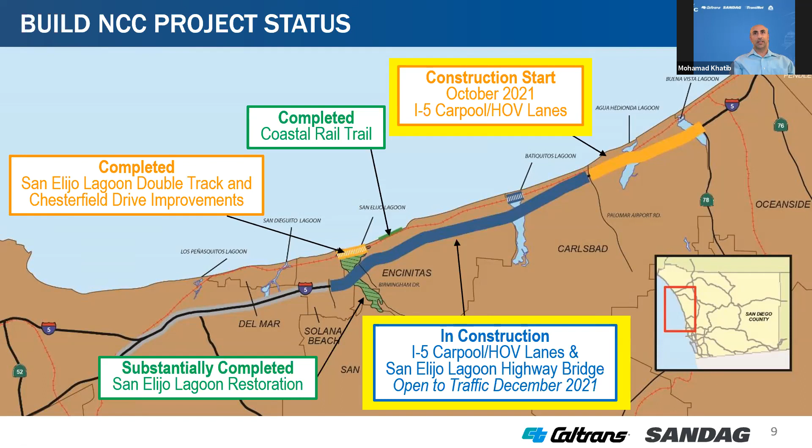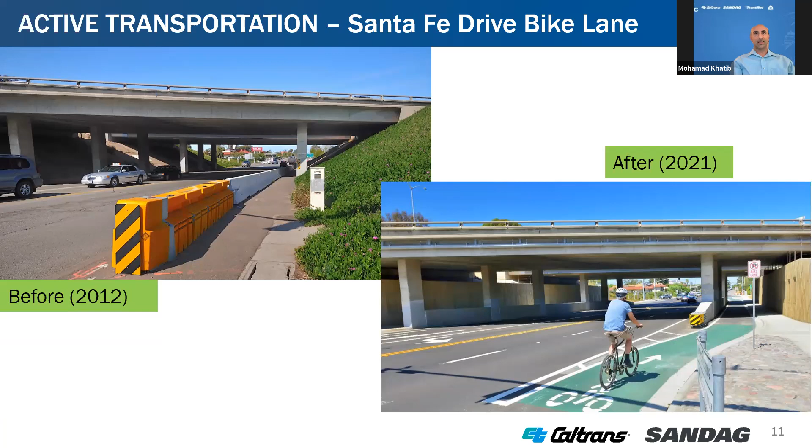Here's an example of a community enhancement at Santa Fe that will reconnect communities, improve coastal access by providing room for bike lanes and wide sidewalks, along with transportation art in alignment with community character. There will be, like Mayor Hall alluded to earlier, an enhancement similar to this at Chestnut Avenue in the city of Carlsbad. We'll talk a little more in depth about that later in this presentation.

Okay, and here's a visual simulation of another active transportation feature where the pedestrian bridge is suspended from the bottom of the San Elijo Highway Bridge to provide north-south connectivity across the lagoon, complementing the trail network in the area.

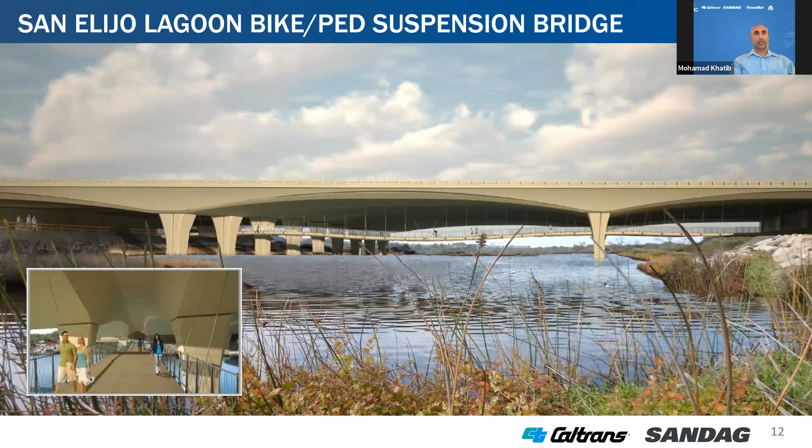Also, as you can see here, the San Elijo Highway Bridge is substantially complete, and it's been quite a journey to get here. Working in wet conditions with sensitive utilities nearby presented a lot of challenges that our construction team, contractor, and designers were able to overcome, providing a new bridge approximately twice as long to facilitate tidal flushing within the lagoon, and almost twice as wide to accommodate the future phase 2 express lanes.

One more note - the work pad and rock you see under the bridge is the final piece of work to be removed to complete the San Elijo Lagoon restoration effort. Thus far, the restoration has shown significant improvement in health, with enhanced tidal circulation, creation of habitat, and restoration of over 470 acres.

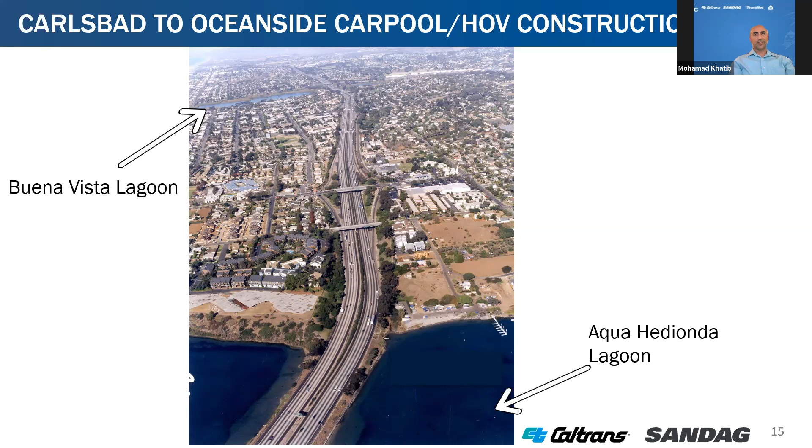Okay, next slide please. So what to expect during construction? As Mayor Hall alluded to earlier - no pain, no gain. On a majority of our highway contracts, night work, ramp closures, and detours are essential for construction. The good news is the majority of the widening for this 4-mile stretch is limited to the median, with minimal impacts to ramps.

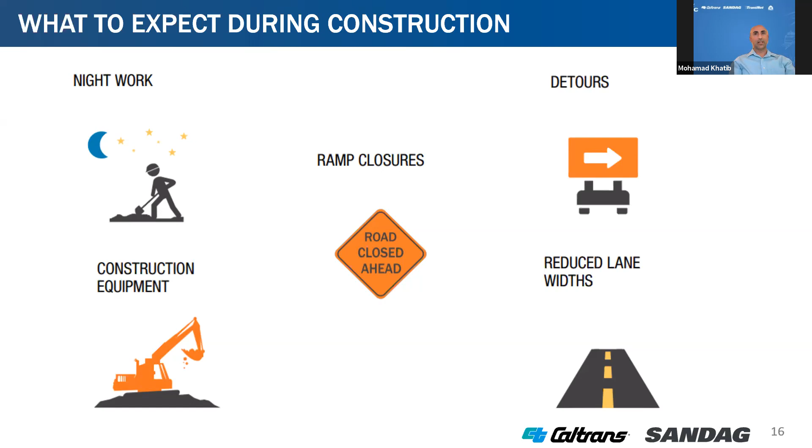Something we've noticed at the beginning of construction projects is that there may be heavier than usual delays as traffic gets used to the construction impacts, such as temporary barriers and reduced lane widths. But with that said, our Build NCC team is active in informing the public in advance of construction impacts so folks can plan accordingly. Next slide, please.

Okay, thank you. So this slide here is our staging exhibit that will help explain how the HOV lanes will be constructed.

Traffic will be shifted to the outside, away from the median, and we will maintain the same number of lanes. However, those lanes will be reduced in width, along with the inside shoulders, to make room in the median for placement of the temporary barriers and to provide space for our work area.

This project will also pilot the temporary striping that Mr. Brian Hadley will be discussing later in this presentation. This staging configuration will also provide standard outside shoulders. The only time the number of lanes will be reduced would be during our temporary night closures.

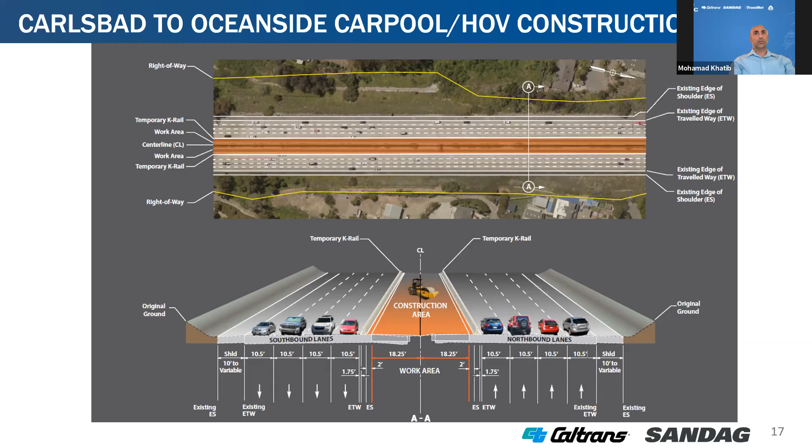This configuration will be in place for approximately 12 to 15 months. After the completion of this stage, the HOV lanes would be open to traffic, and temporary barriers would be shifted to the outside for the construction of auxiliary lanes. Okay, next slide, please.

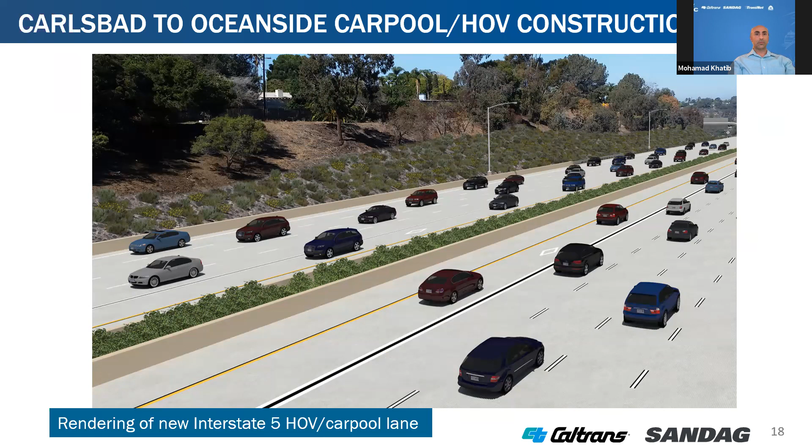So after it's all said and done, the final product would provide one HOV lane in each direction, standard outside shoulders with variable width median shoulders. We'll also replace the median oleanders with native coyote brush. And that's a simulation of what the product would look like.

This is the Chestnut community enhancement. As part of our phase 1 improvements, we collaborated with the city of Carlsbad on this location. The improvement here will include retaining the abutments of the undercrossing to provide room for bike lanes and wider sidewalks for improved east-west connectivity under I-5. We're also excited to incorporate the transportation art based on the city's recommendation.

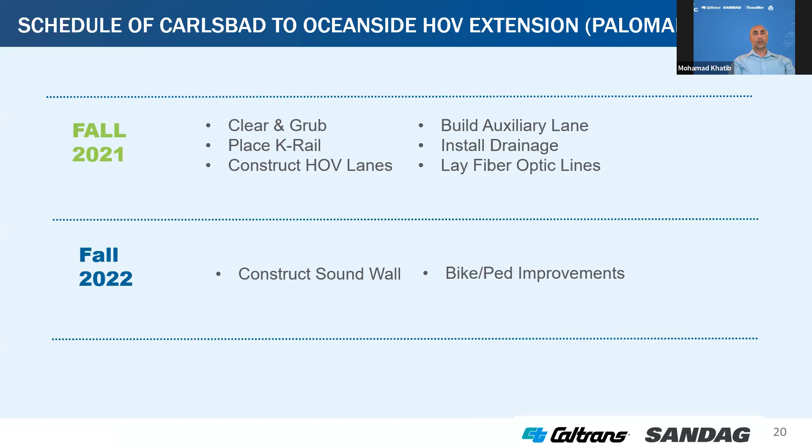As far as the overall project schedule, this fall you'll see crews placing temporary barrier in the median, clearing the vegetation, installing drainage and other utilities like fiber, and following up with construction of the pavement. Next fall, you'll see crews mobilized to the outside to start construction on the sound wall, the Chestnut community enhancement, and aux lanes.

Some of our upcoming milestones include the completion of the San Elijo Lagoon Highway Bridge, along with the pedestrian suspended bridge, and then the completion of the carpool lanes up to Palomar Airport Road. These two events will culminate with a ribbon cutting that's tracking for end of the year, early next year.

We will also be closing gaps within the San Elijo Lagoon Trail Network and completing a portion of the North Coast Bike Trail. As we know, with the addition of carpool lanes to our network also comes sound walls within the corridor. And I'll now hand it over to my colleague, David Stebbins, to get into more detail about sound walls. Thank you, Mohamad.

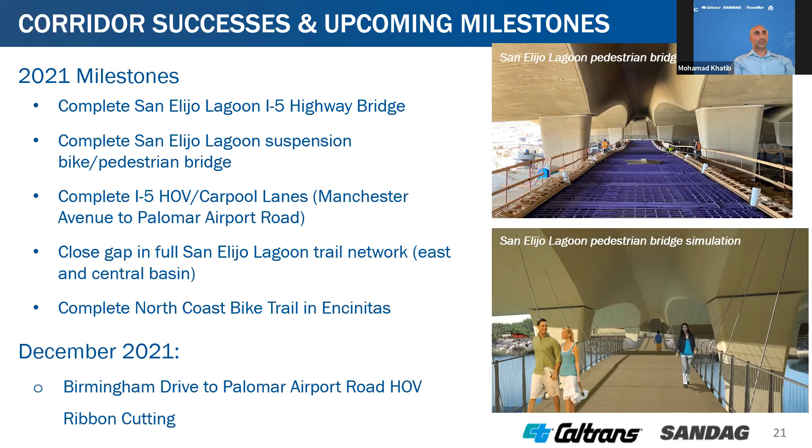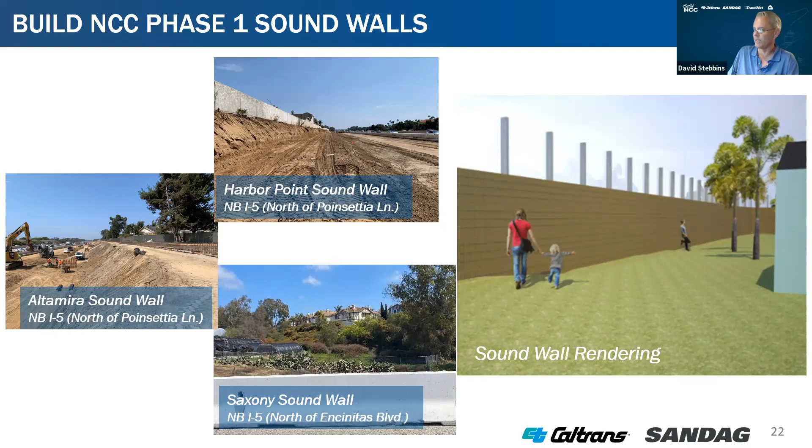Now in Carlsbad, we're recommending 15 walls total. 3 of the walls are in phase 1. Just north of Poinsettia Lane on the east side of the freeway are 2 sound walls currently in construction, in the Harbor Point and Altamira communities. There's another wall just south of Tamarack Avenue on the east side of the freeway, at the Casa Riviera apartment complex, and that's the wall that's going to start construction in 2022.

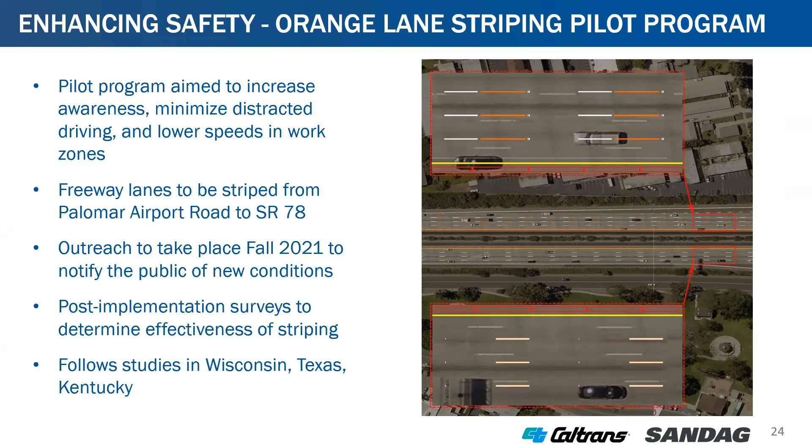Okay, so the types of contrast we're going to use: in the southbound direction, we'll use orange that'll precede the white lane line, like you see on the top left there. And then on the northbound direction, the lane lines will have orange along the sides.

Part of the reason we chose that option is if you're driving southbound, a lot of times the low winter sun will kind of fade out stripes. So we wanted to have a really visible one for the southbound. Go ahead, next slide.

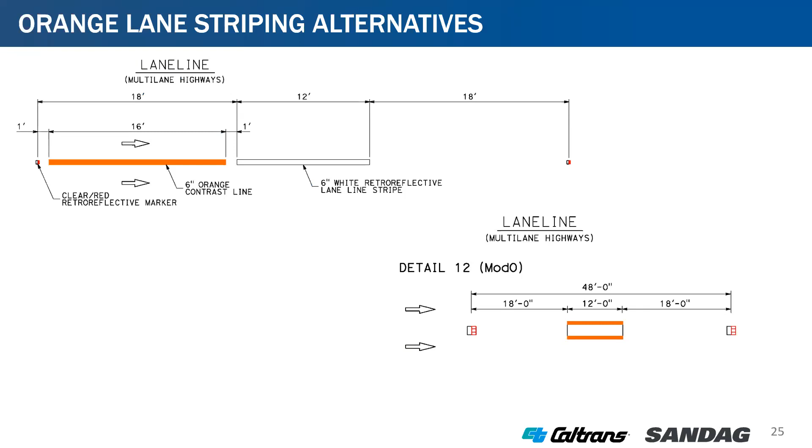And then for what we call trap lanes and your gores at on and off ramps, in those cases we're going to use the same, what we call the Oreo pattern, because just like we're doing on the northbound for lane lines, that's kind of your only option to contrast those. For the right edge line, there'll be an orange stripe along the right side. So you can probably tell from these examples, it's what you're used to seeing on permanent delineation that has black contrast, and that's what's different about what we're doing in California. It's the first time we've kept the normal delineation, but contrasted it.

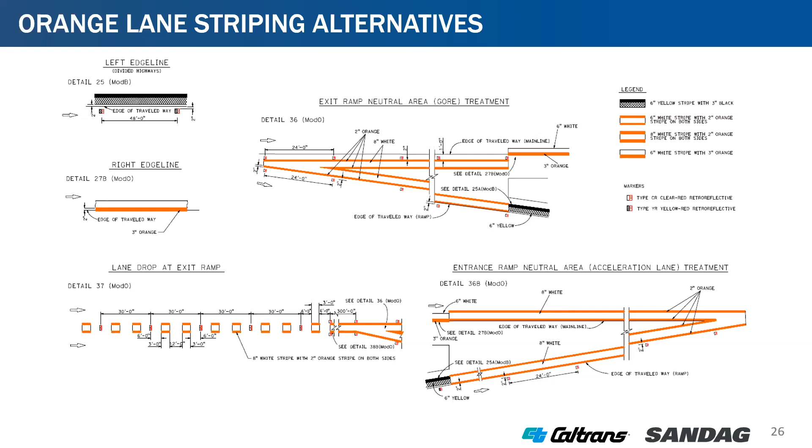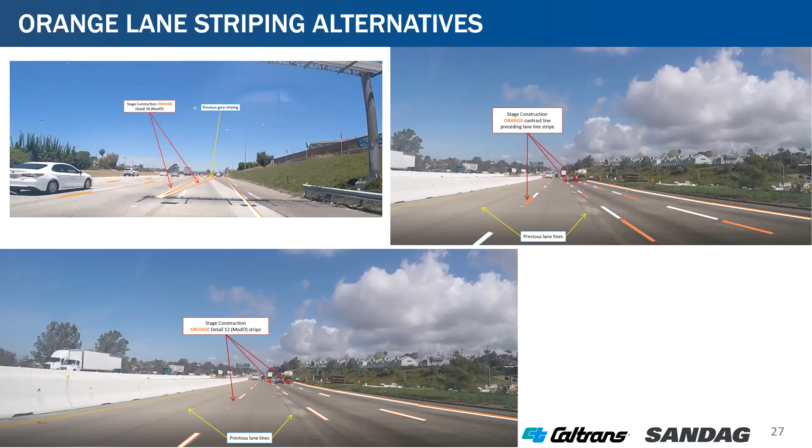Let's go to the next slide. Now I'm going to go to a polling question. I was wondering, are you aware of the reduced speed on this I-5 corridor within the construction zones?

Yeah, that's good, that's a real high percentage of people that are aware. So that's good news. I'm glad to see so many of you are following the safety precautions and being aware of this work zone speed reduction to protect our NCC crews who work out on the highway.

Now I'd like to address safety throughout the corridor. As many of you are aware, the speed limit is reduced to 55 within the construction zones, and this will be enforced to protect yourself and the construction crews that often work within just a few feet of fast moving traffic, especially when we're in these temporary closures at night with cones.

You should also be aware of wrong way drivers and never drive under the influence. This will protect you and helps us prevent wrong way driving collisions. Please also note that fines are doubled within construction zones, so be sure to slow down and stay alert.

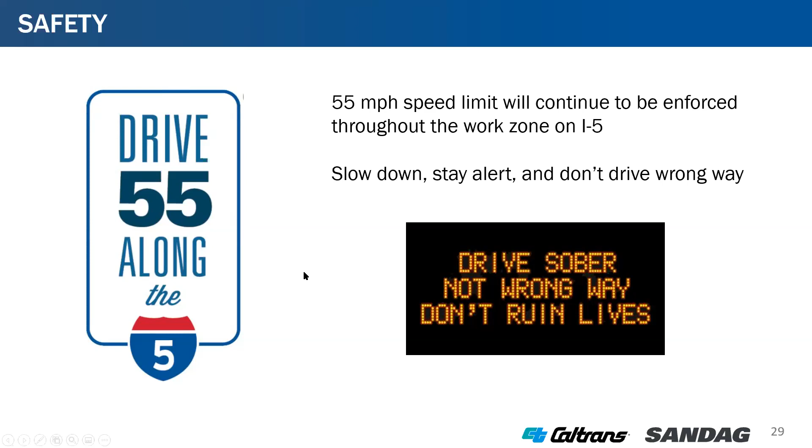Thanks a lot, Brian. Hi, everyone. I'm Marisa Mangan, a planner at SANDAG, taking a little pause to let you know about some work we're doing, because we're responsible for developing our regional transportation plan every 4 years.

Build NCC is a great example of a complete corridor in process, coming to fruition, and the possible projects included in the regional plan align well. Our plan is centered on 5 interrelated strategies that, when linked together, connect our transportation system in a way we've never done before.

Starting first with complete corridors, this is how we re-envision highways and major roads to make space for all modes, all while leveraging technology to help keep people and goods moving smoothly. In the future, we can even think about new technologies like wireless inductive charging infrastructure embedded in roadways to help facilitate the expansion of electric vehicles, electric trucks for freight, and more.

Transit Leap refers to the full range of public transit options that would offer much more frequent and convenient services, everything from higher speed commuter rail to improved light rail services and a whole web of next generation rapid buses that would have better priority on our roadways to cruise by the congestion.

Mobility hubs are the third move, and nearest and dearest to my heart. We refer to mobility hubs as whole communities where there's a high concentration of people, travel options, and supporting amenities. It's a place where you can get a lot of different types of services on demand, with access to amenities like last mile trip solutions and secure micromobility parking.

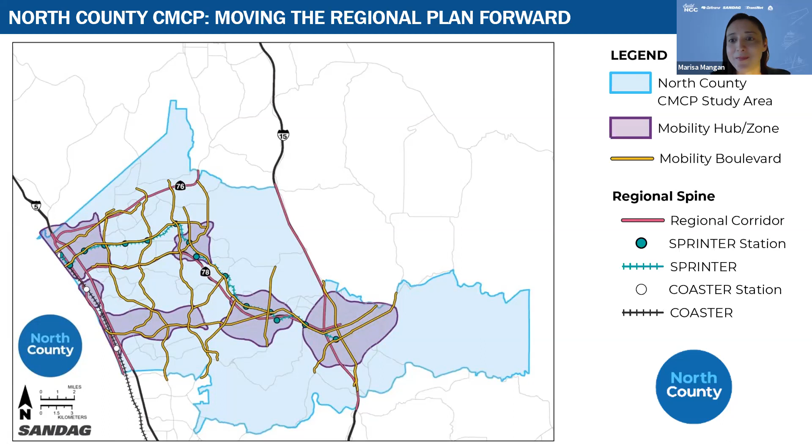Hello everyone, my name is Erica Sari. I am a consultant to SANDAG and part of the North Coast Corridor project team. As part of the regional plan and to reduce congestion during construction, the project team is helping provide resources for commuters that travel this corridor. I work with employers and commuters throughout the San Diego region on the iCommute program and help develop transportation demand management strategies for this project.

The goals of iCommute are to reduce congestion and greenhouse gas emissions, all with the purpose of having a better quality of life. We recognize that with the challenge of construction, there is inevitably cars slowing down and traffic. We want to work with commuters to rethink their commute on the corridor by supporting hybrid work schedules, teleworking, or even ride sharing via carpool, vanpool, or taking transit as ways to reduce cars on the corridor.

So iCommute offers various resources that can help develop or enhance commuter benefit programs for companies, and we also work with individuals. I want to tell you about two different campaigns we're excited about as we work with companies and the community now on these events. We're gearing up for Rideshare Week during October 4th to the 8th and Clean Air Day on October 6th.